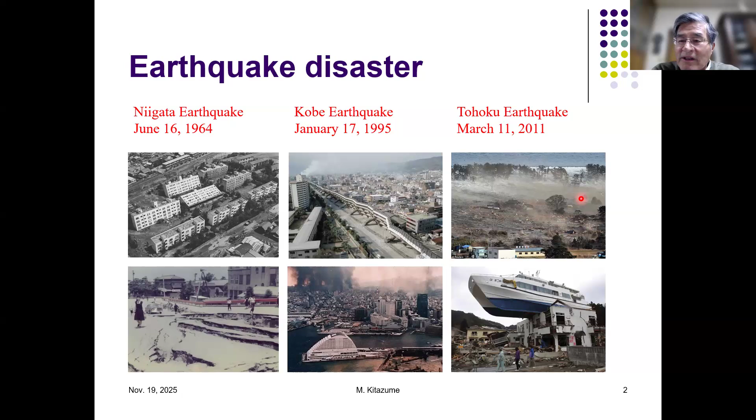Recently, in 2011, we had another huge earthquake in the Tohoku area. In this earthquake, we had a very, very huge tsunami attack, and the tsunami destroyed sort of everything like that.

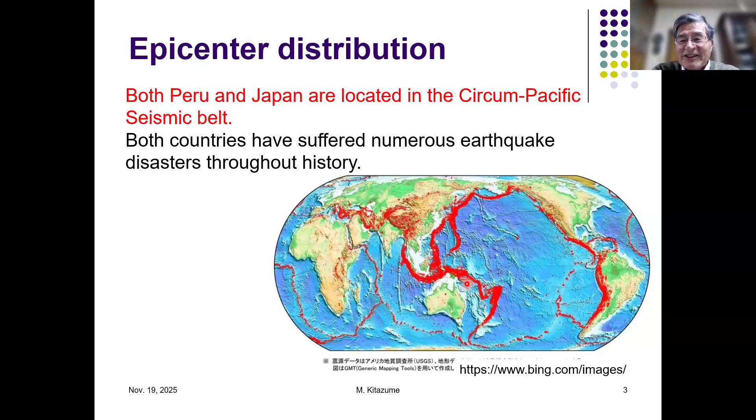Now I'd like to show you our position and also your position in Peru. This graph shows you the epicenter distributions worldwide. In Japan, we are located in this area, and you in Peru are located in this area. This graph clearly shows that Peru and Japan are located in the Circum-Pacific seismic belt, as you can see with the red line. Your country and our country have suffered numerous earthquake disasters throughout history. Maybe you and we are in the same situation.

According to the internet, I summarized several earthquakes in Peru. I think you had a very huge earthquake in 1687, and at that time the casualty was about 5,000, and you had a very large tsunami attack. Also, unfortunately, your country has had many houses damaged by earthquakes. Recently, in 2007, you had a huge earthquake of magnitude 8, and you also had a huge tsunami attack. But in several earthquakes, you also had landslides, maybe in the inland area in Peru.

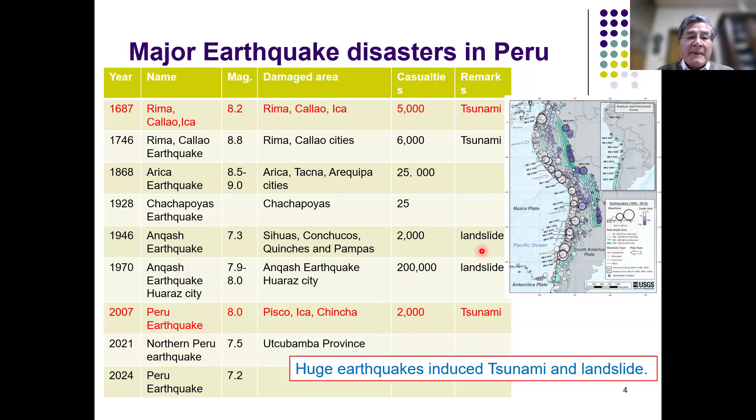So the graph shows the earthquakes in Japan. We have many earthquakes. These are the small ones - the list of earthquakes in Japan.

In 1923, we had a huge earthquake in the Kanto, Tokyo area. The name is the Kanto earthquake. This earthquake had a magnitude of 7.9, and the number of dead is more than 100,000.

In 2011, we had the Tohoku earthquake, with a very large magnitude of 9. The number of deaths is about 22,000, and most of them are due to the tsunami attack.

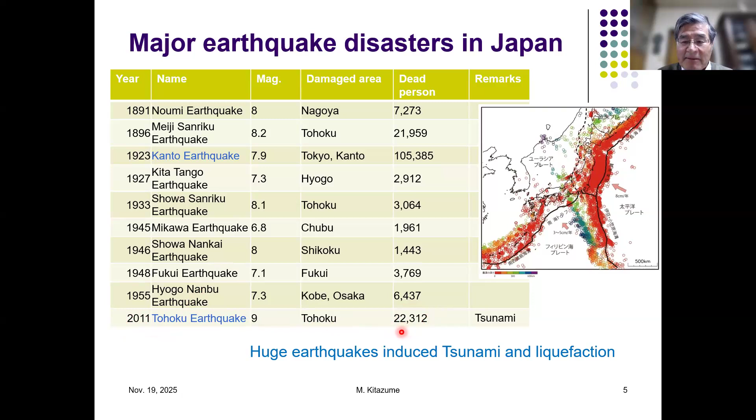This is one interesting thing - how these presentations show that your country and our country are connected regarding earthquakes.

This is one example - not Peru, but in 1960 the Chile earthquake took place. In Chile, more than 2,000 casualties occurred in Santiago.

At that time, a huge tsunami of 18-meter height attacked Hawaii Island and also Japan. In Japan, we had a huge tsunami of 6-meter height that attacked Kesennuma in the Tohoku area, causing serious damage, including more than 1,000 casualties.

You can see some photos. This one on top shows the damages in Chile, and at the bottom this figure shows the huge damage by the tsunami in the Kesennuma Tohoku area.

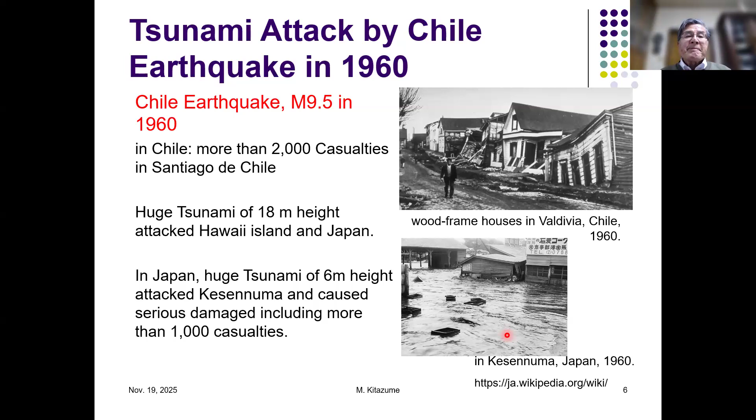So now we have to recognize that your country and our country both have a very potential risk about earthquake attack disasters.

The earthquake causes many damages, but one factor is landslide, or liquefaction, or tsunamis. Now I would like to talk about liquefaction mainly in this lecture.

As you already know, this graph shows the liquefaction mechanism and the liquefaction chain. This is the sequence of how liquefaction takes place. At the first stage, the earthquake has to take place.

Then shear strain is induced in the ground by the earthquake motions, and this enhances the generation of pore water pressure in the ground. During the earthquake, as shear strain is induced, pore water pressure accumulates.

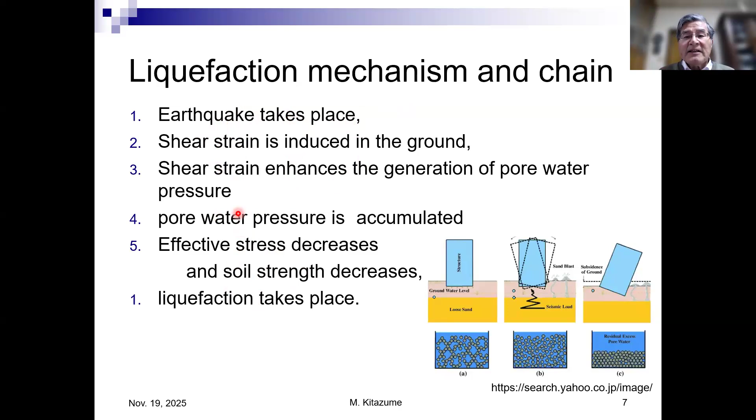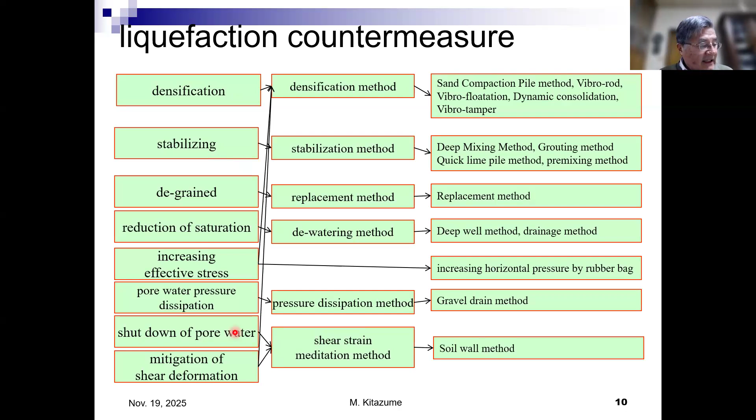There are many techniques developed in Japan and applied for preventing earthquake disaster, or also for increasing bearing capacity or reinforcement. Roughly we can categorize them into two: one is in situ stabilization, and the other is site stabilization, a sort of planned stabilization.

In situ stabilization has three techniques: shallow mixing method, mid-depth mixing, and deep mixing method, which differ regarding the depth of the improvement stabilization.

In the case of site stabilization, I can list two techniques: one is the premixing method, and the other is SGM, super geomaterial lightweight treated soil method. I would like to show these techniques very briefly, mainly for application to earthquake disaster.

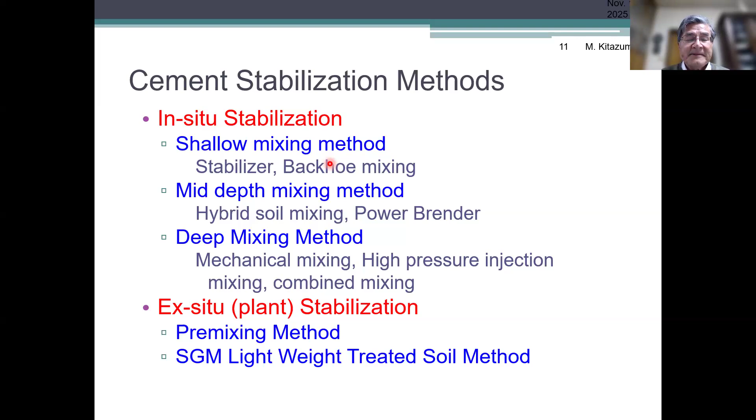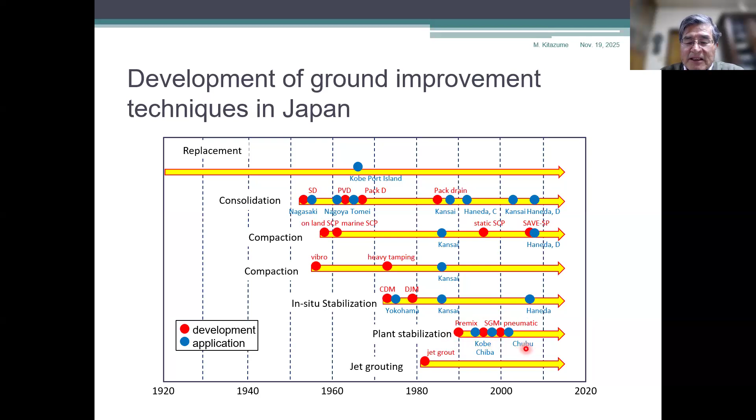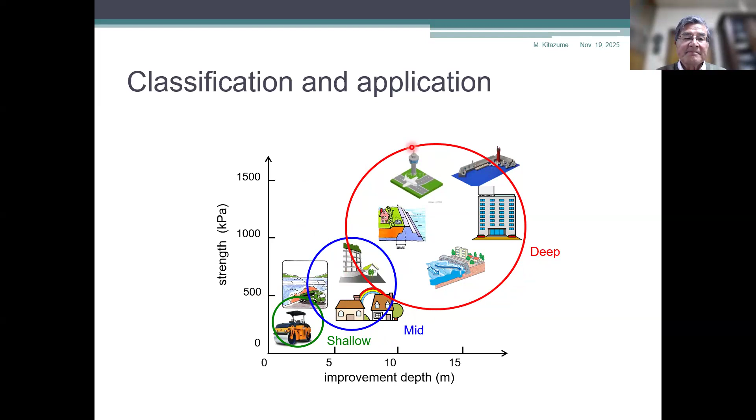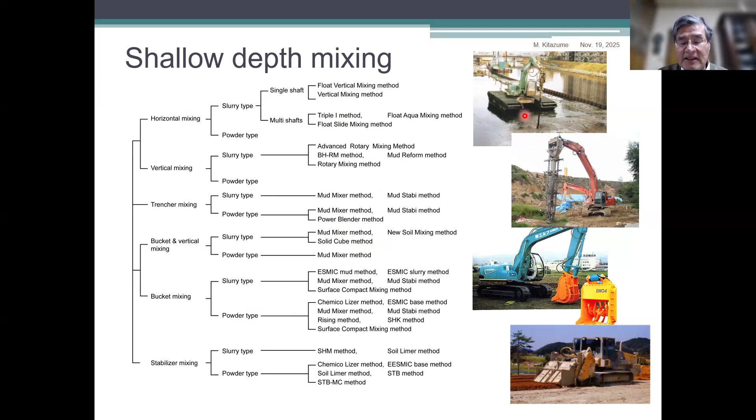One of the major shallow mix stabilization techniques is stabilizer mixing, which has been applied mainly for road constructions.

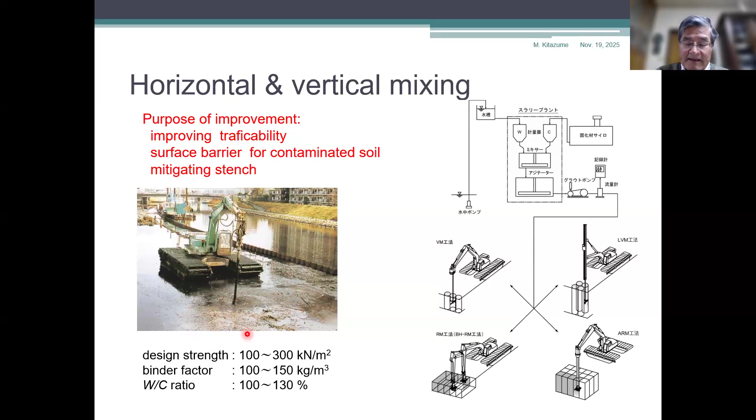Another technique is horizontal and vertical mixing. We have a mixing shaft, and the horizontal mixing blade is located at the end of this shaft. Cement is supplied into the ground and mixed with the original ground by means of the mixing blade.

Now, the mid depth mixing technique also has many sub-techniques.

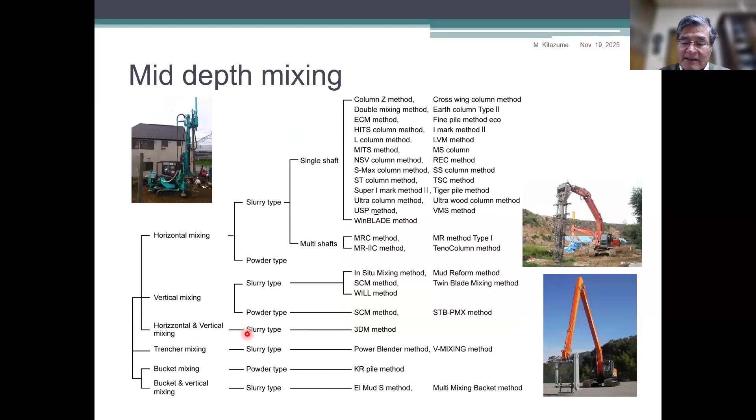This is horizontal mixing. It's very similar to the deep mixing, mechanical deep mixing technique. You can see the vertical mixing shaft, and also the horizontal mixing blade at the bottom end of the mixing shaft.

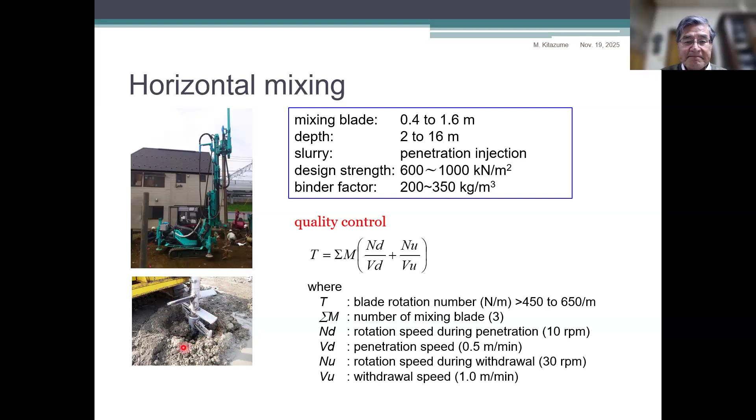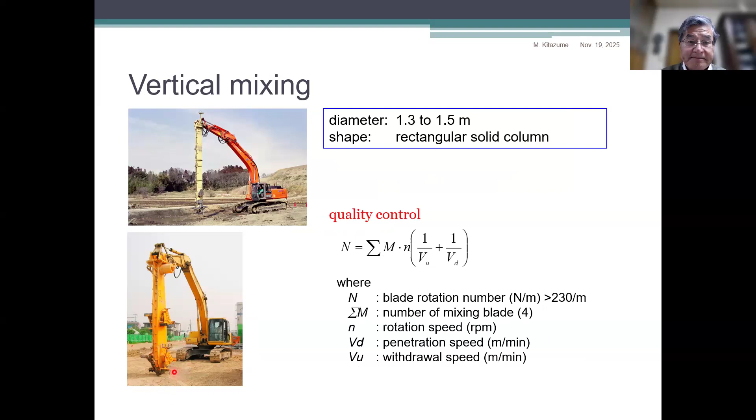This technique is very unique. We call it the trencher type. It's a sort of chainsaw type - you can see the chainsaw-like mechanism with several mixing blades. The chainsaw rotates into the ground, and we can mix the cement slurry and the ground with the help of this chainsaw.

Now I would like to show you deep mixing. This is deep mixing, roughly speaking the mechanical one, and the high pressure injection method is also jet grout. In the case of the mechanical technique, you can see the mixing shaft, and there are several mixing blades at the bottom end of the mixing shaft.

This is the jet grout type. High pressure is injected into the ground, and this jet grout cuts the soil, then mixes the cement and the soil with the help of this jet.

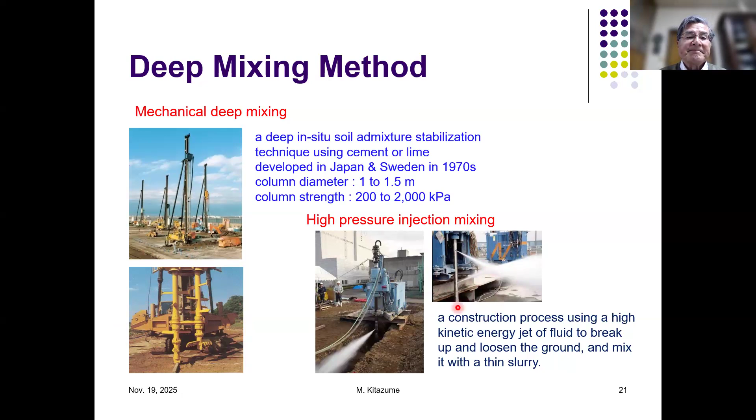Okay, oh no, I'll show it. I can show - oh sorry. Now I would like to show you several combination applications.

This is one application of deep mixing for liquefaction prevention at the Kushiro port in the Hokkaido area. This is the port facility - the sea revetment is the caisson type, and this is the original ground. Behind the caissons, there are several types of techniques applied for mitigating liquefaction. One is gravel drains, this is deep mixing, and this area is not the improved area but just filled with gravel. The deep mixing and gravel drain techniques are applied there.

Fortunately or unfortunately, the Toho-Oki earthquake attacked the port in 1994, after the ground improvement. So we can see very clear comparisons for evaluating the ground improvement.

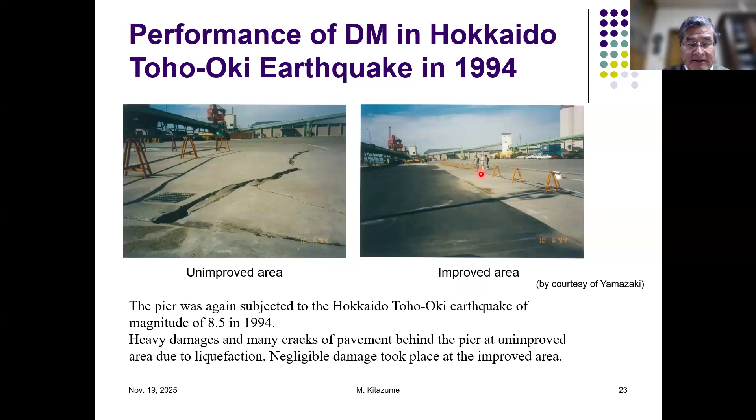In the case of the unimproved areas, you can see that the ground settled down, and you can see very large cracks on the road. But in the area improved by deep mixing, the ground is still flat and there are no damages. These two figures clearly show the high efficiency of the ground improvement technique.

Now I'd like to show the grid type deep mixing. This technique is very common nowadays in Japan.

In the case of the original ground, these are the ground levels. When an earthquake attacks the original ground, the soils in this area are induced with shear stresses like that. As I explained before, these shear strains generate pore water pressures, and after accumulating pore water pressure, finally liquefaction will take place.

But if we construct a very hard, improved ground like a wall here, the grid type - when an earthquake attacks this ground, the non-improved area tends to develop shear strain.

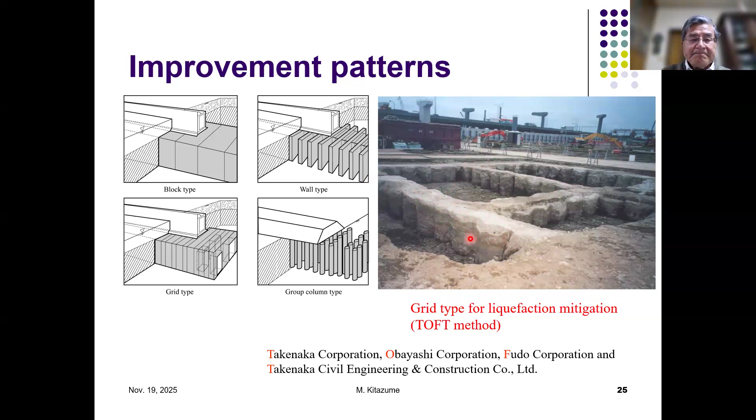We have a very good example of a successful application of the grid type in 1995.

In 1995, we had a huge earthquake in the Kobe area, in the western part of Japan. As I showed you before, the highway totally collapsed, part of the bridge fell down, and huge buildings collapsed.

But I'd like to show you one building here, called the Oriental Hotel. This hotel was under construction at the time of the 1995 earthquake, fortunately or unfortunately. This building, the hotel, was constructed very close to the shore area.

This is the plan view and sectional view of the building and the ground conditions. You can see the black line here - these are the piles supporting the main building. You can also see the small, gray piles.

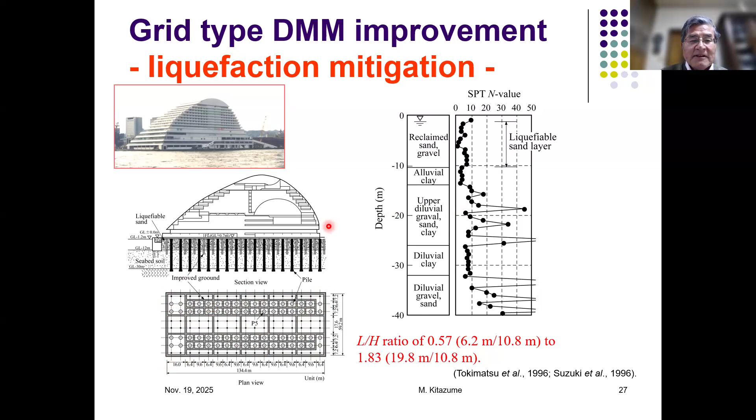Under the construction of this building, the earthquake attacked.

This figure shows the building and the surrounding areas. In the surrounding areas, these are the quay areas, and there was no ground improvement. Liquefaction took place, increasing the pore water pressures very high. These pore water pressures pushed the sea revetment to the left-hand side, and the ground settled down like that.

This figure shows the parking area under the building. This area was already improved by the grid type mixing as shown before, so nothing happened, no damages. These two figures clearly show the successful application of the grid type.

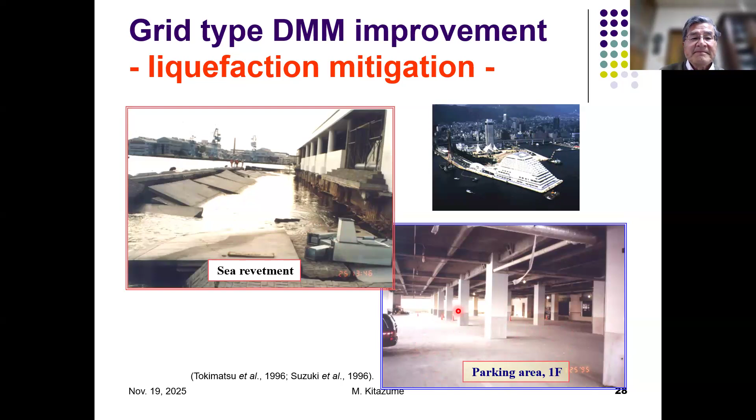Now I would like to show another earthquake, the 2011 Tohoku earthquake. In this earthquake, we had a very huge tsunami attack like that.

But in the case of ground improvement, after the earthquake we surveyed the application and effectiveness of the ground improvement in several areas. These top figures show the damages in the unimproved ground area, and the successful application of improved ground for the river embankment. The middle one is very similar, for the river embankment and also the road embankment.

These figures clearly show successful applications. This top figure shows the block type improvement, where all the ground is improved - the improved ground area ratio is 100%. But the bottom one shows the grid type improvement, where half of the ground was improved by the grid type. In the case of the grid type, there are no damages either.

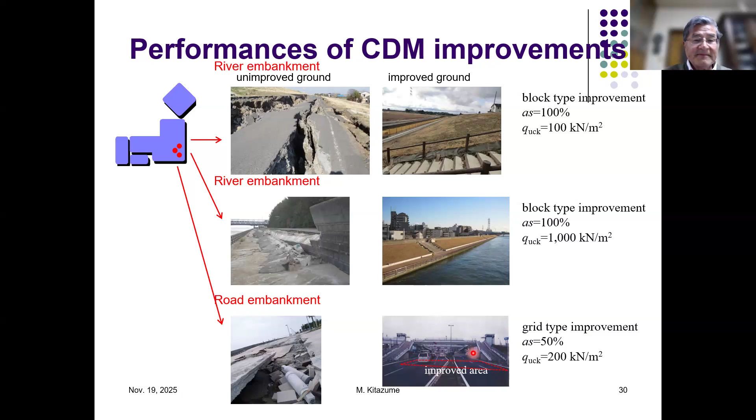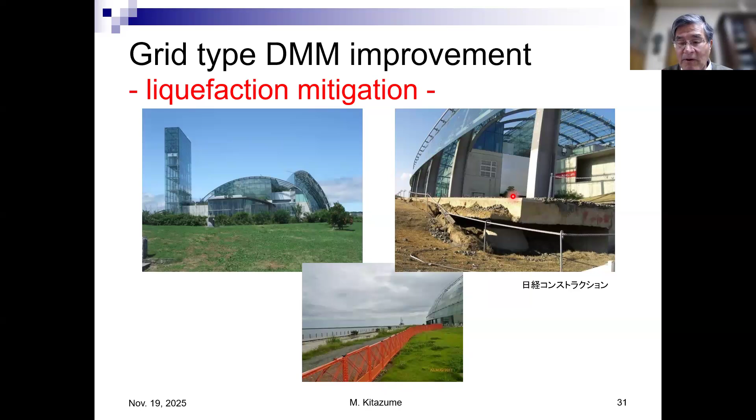This graph shows similar applications of the grid type to the aquamarine buildings. In the surrounding area, the unimproved area was heavily damaged. But the main building, which was reinforced by the grid type, had very, very small damages.

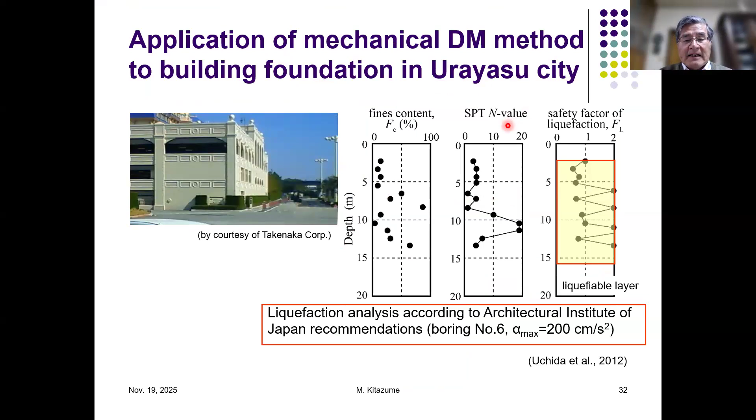Another application is in the Urayasu city area, Chiba prefecture, very close to the Tokyo area. This is the parking buildings. The top layer here is a liquefiable layer, so the grid type improvement was applied at this area.

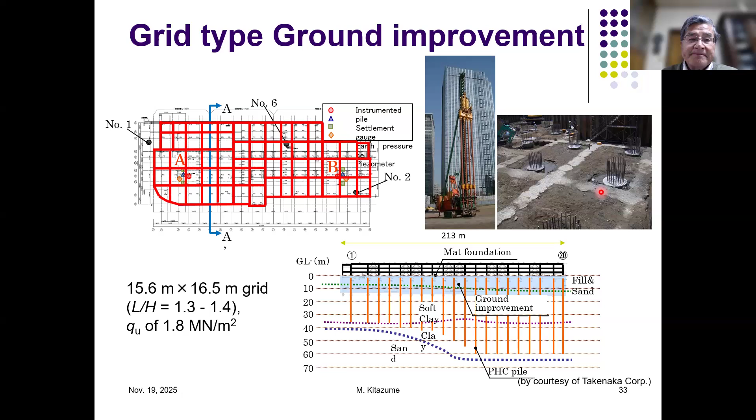You can see piles for supporting the building, and these are grid types for mitigating the liquefaction. We can recognize this as a very nice, successful application. This is another example, but this figure was already shown before.

Now, cement stabilization techniques are applied for many purposes. One of the purposes is preventing earthquake disaster, and of course for preventing liquefaction. There are two techniques.

One technique is to improve the whole area in the ground, as I showed before. But another type is the grid type, like that. In this case, the area ratio, the improvement area ratio, is 50%, which is much more economical compared to whole area improvement.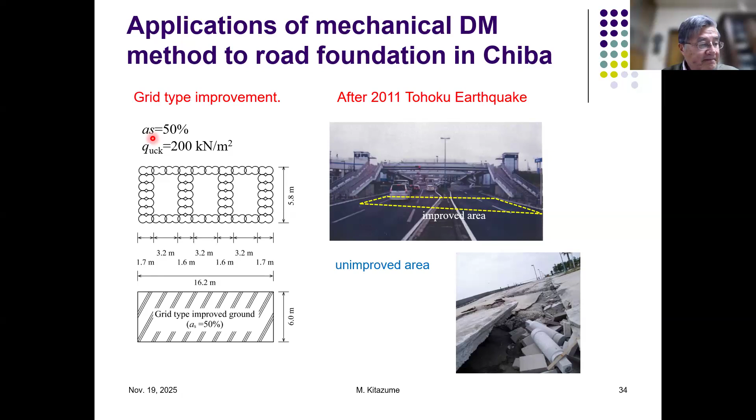Now I'd like to show you another application, the pre-mix method. This is not the in-situ technique, it's the ex-situ technique. In this technique, during land reclamation, we usually use sand material for the land reclamation. But clean sand especially tends to liquefy so easily.

So we put a small amount of cement with the sandy materials to enhance the cohesive strength, not the frictional one, the cohesive strength. You can see the left-hand side figure shows unstabilized soil sand like that, but on the right-hand side you can see the sand particles are a little bit covered by the cement. So due to the cement, we add a small amount of cohesive strength to this material.

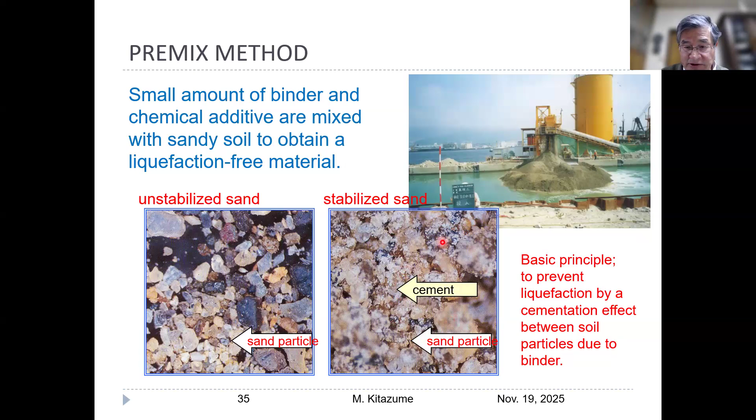Okay. So this graph shows you one of the applications of this technique.

In 1995, we had a huge attack in the Kobe area. In the port area, the caisson type revetment settled and fell down because at that time the ground behind that area was not improved. That's why liquefaction took place, and the large water pressure pushed the caissons, moving them to the left-hand side and causing them to go down.

After the earthquake, we excavated this area and replaced it using the premix technique, as I explained before. This area is stabilized soil. Fortunately, we have not had any huge earthquake since 1995.

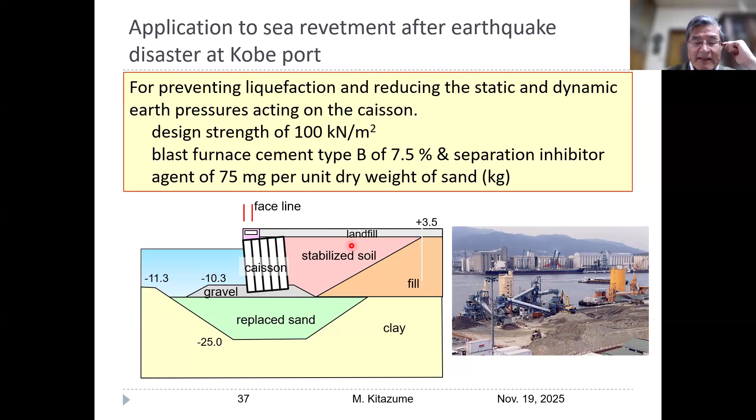So we do not have clear evidence for the effectiveness, but we expect this stabilized soil area should show very good performance for preventing earthquake liquefaction.

Another application is in the Tokyo area. This is the Tokyo Bay area, with Tokyo and Kanagawa Prefecture on the left and Chiba Prefecture on the right. The Trans-Tokyo Bay Highway connects the Kanagawa area and the Chiba area, underwater, through a tunnel like that.

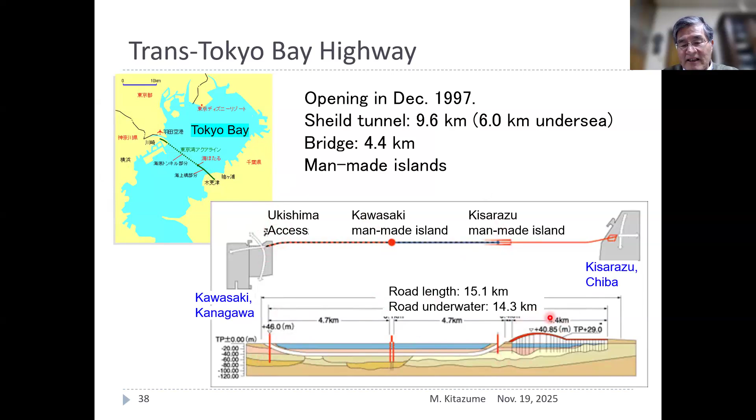The left-hand side is what we call the Ukishima Access. The middle is the Kawasaki man-made island for ventilation. And this is the Kisarazu man-made island in the Chiba area. I will show you this area.

So the premix technique was applied to the Kisarazu man-made island areas. This is a sectional view, and this was a plan view. For example, this one is the revetment here, and then you can see a culvert or tunnel here. The premix technique was applied at these portions.

The main purpose is bearing capacity increase for the load, and also preventing liquefaction.

In this case, the design strength is about 400 kPa. The cement used was blast furnace slag cement type B, with a dosage of 100 kilograms per cubic meter.

So you can see the construction site. Both ends were covered by sheet pile, steel pile, circular cell like that, and then the soil and sand were filled in this area.

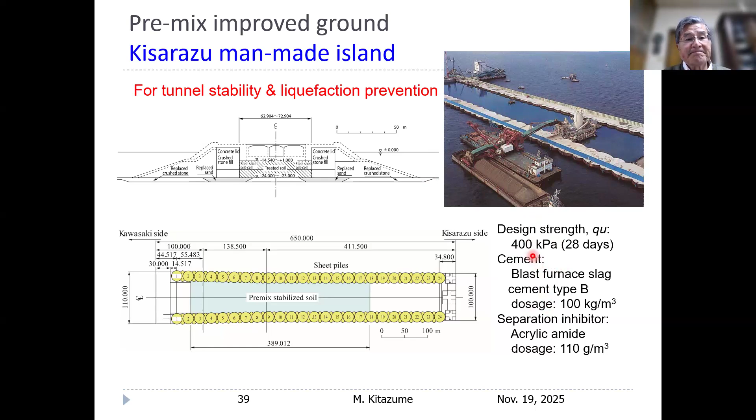Now I'd like to show you the anticipated earthquakes. Again, we had many huge earthquakes: the Kobe earthquake in 1995, and the Tohoku earthquake in 2011.

Unfortunately, we had very huge damage from these earthquakes, but we developed many techniques for mitigating and minimizing earthquake disasters. Now we have an anticipated very huge earthquake which will cover the western part of Japan, named the Nankai Trough earthquake, covering the Tokyo and Osaka area.

According to earthquake scientists, the estimated earthquake magnitude is about 9, which will induce liquefaction and tsunami attacks. The number of deaths is estimated at about 300,000, and the damaged buildings are about 2.3 million. Economic loss is about 200 billion US dollars.

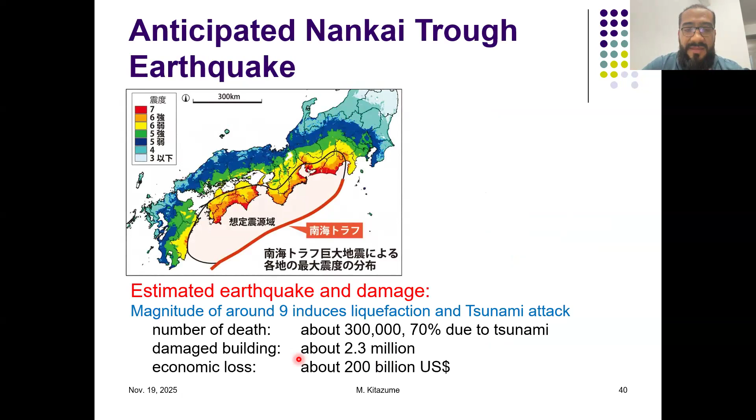Okay. Just a moment, let me go back. I'll go back. Okay, it's okay.

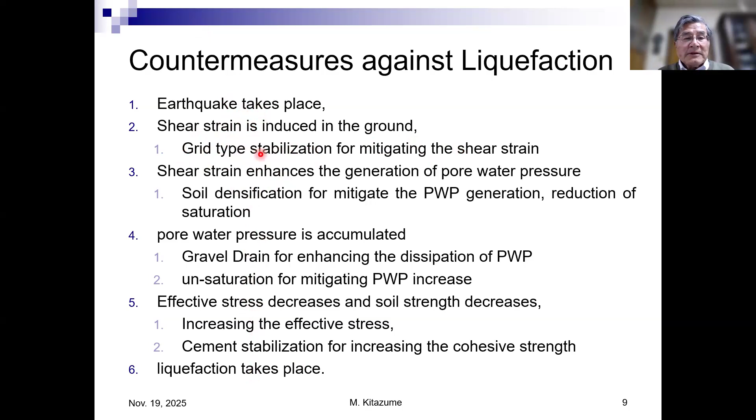This one. As I explained before, this is the liquefaction chain, some of the stages: earthquake, shear strain, and so on. So in my presentation I showed you several applications, mainly this one. Of course, just one, sorry, like that.

Of course, I'm afraid I might have misunderstood your question. So at that time, please tell me again.

Of course, and the spacing and strength should be designed by considering the ground conditions and the expected earthquake motions. Unfortunately, we don't have detailed design procedures for this technique.